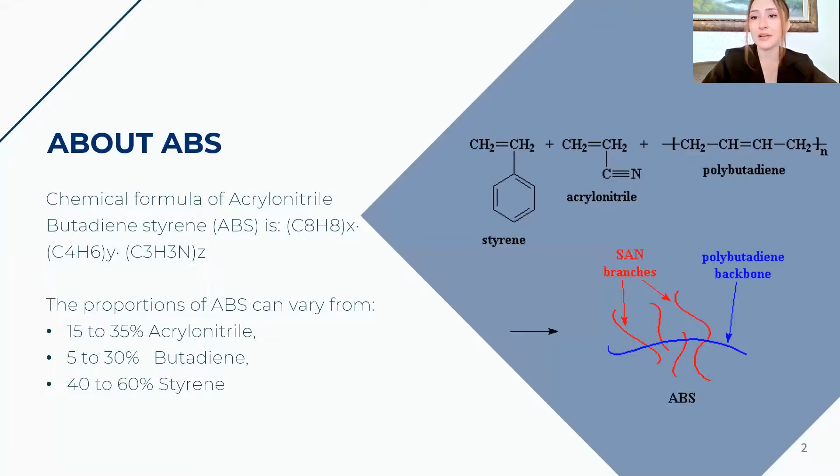Hi everyone, I'm Eda. Today we'll talk about acrylonitrile butadiene styrene production plant. ABS is a common polymer made by polymerizing styrene and acrylonitrile in the presence of polybutadiene. ABS production has been growing over the years and is projected to reach approximately 12.5 million metric tons in 2023.

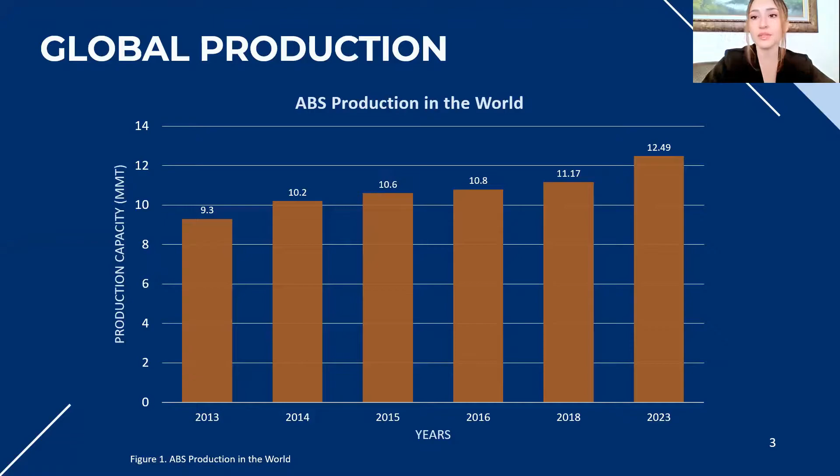The Asian market is a really important point for ABS production. The highest demand in Asian countries belongs to South Korea. Korea and Taipei are leading the import and export of ABS in 2019. Europe is not as important as Asia in ABS production. Italy, Spain, and the Netherlands are seen in ABS production in the Europe region.

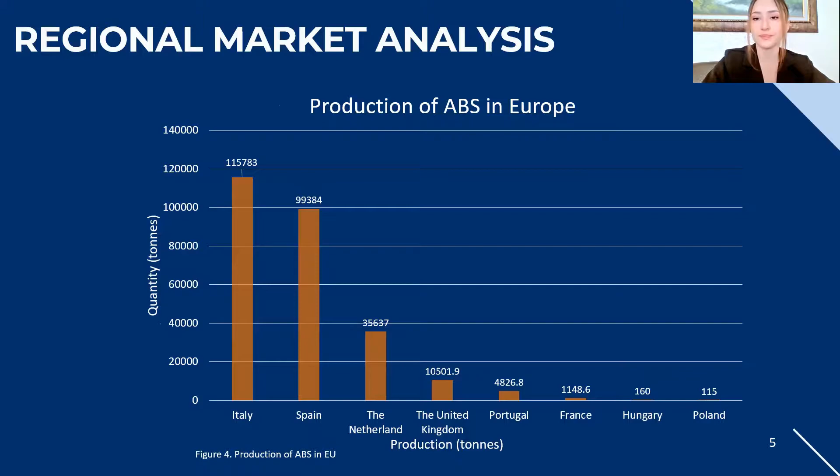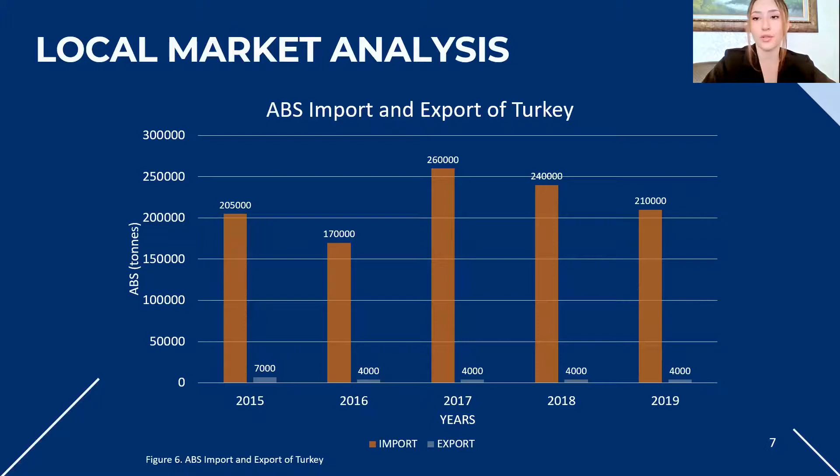China can be called the ABS importer of the world. Considering the export values, it is seen that they are quite low. It generally has more than 2.5 million tons of ABS imports. Turkey plays a role as an ABS importer. Export quantities are not as sufficient as import quantities.

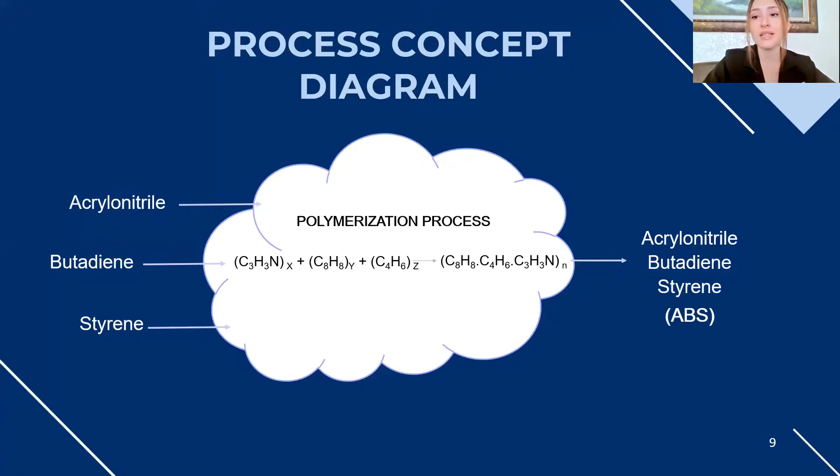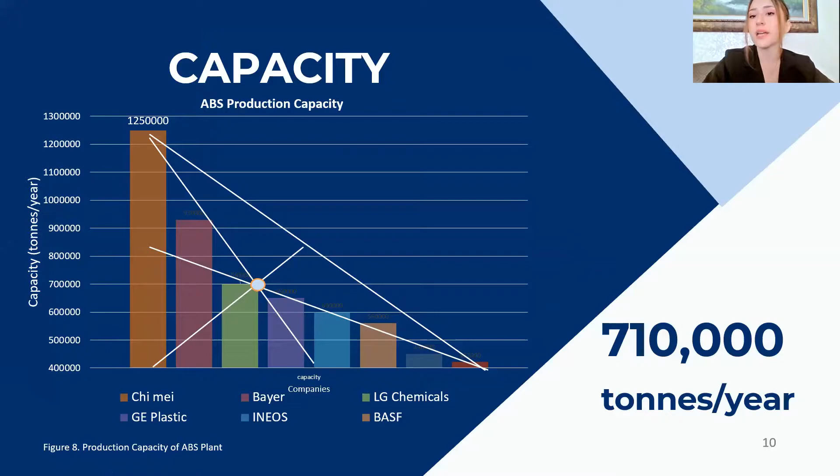In the process concept diagram, we see that we obtain ABS from acrylonitrile, styrene, and butadiene with a suitable polymerization technique. According to the annual tonnage-based capacities of these companies, we have determined the capacity of our factory as 710,000 tons per year. Calculating our raw materials and product on the basis of reaction, the profit margin we get is 1,389.

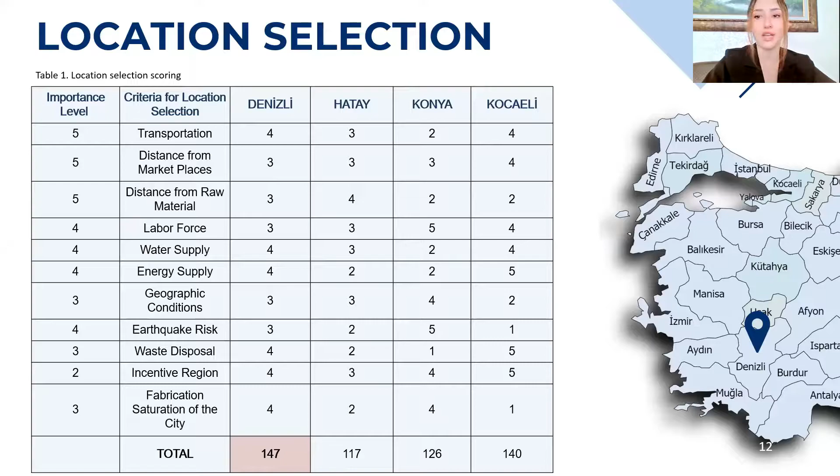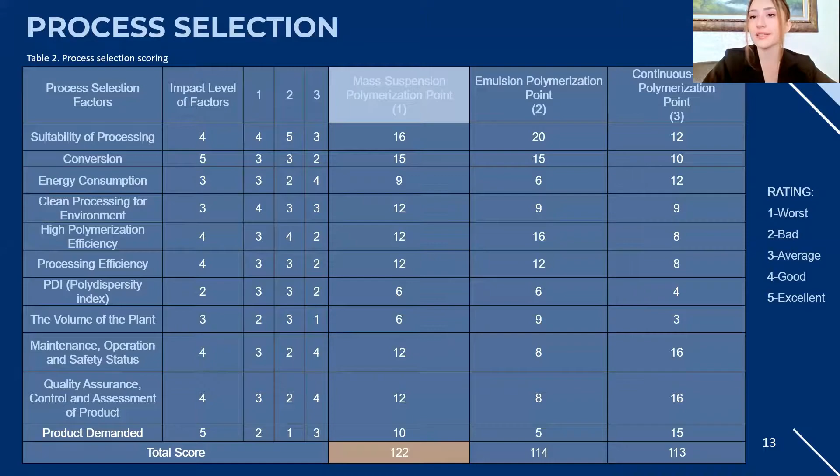While choosing the location where we will establish the factory, we considered various parameters, and then we chose Denizli, which reached the highest score, as the location of our factory. Mass suspension, emulsion, and continuous bulk polymerizations are the options we can use. By scoring, we decided that the most appropriate technique is mass suspension polymerization.

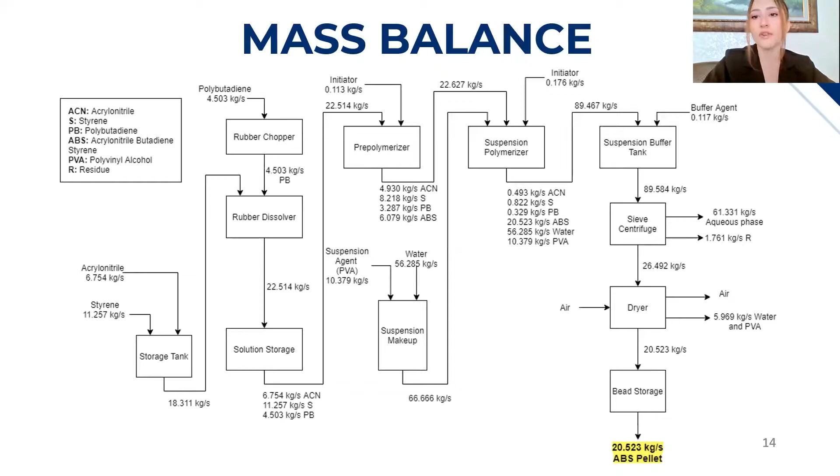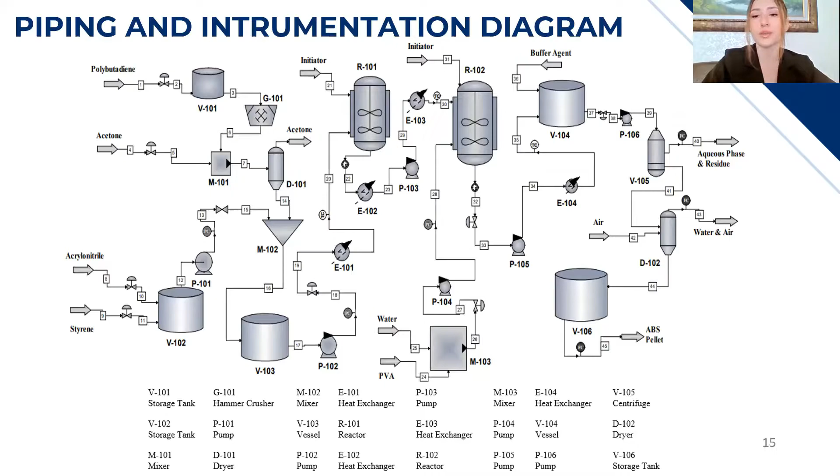By providing raw material input to the process we have chosen at the flow rates you see in the figure, we obtain 20.5 kilograms of ABS pellets per second. In the design of this process, we use ChemCAD to show the diagram, and by using the necessary process control equipment, we ensured the safe and controlled operation of the process.

Hi, I'm Burak. Suspension polymerization allows for easy removal of reaction heat and operational flexibility for polymer with controlled composition and particle morphology. Two suspension reactors are used. Each of these reactors requires a cooling jacket due to the exothermic reaction and an agitation mechanism.

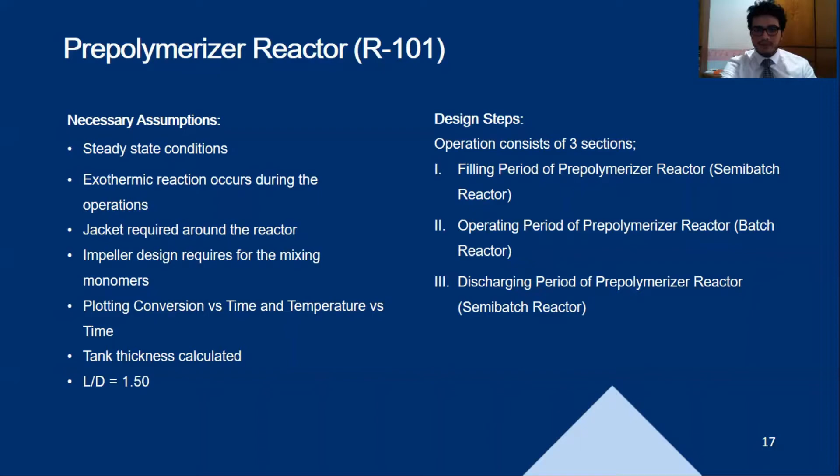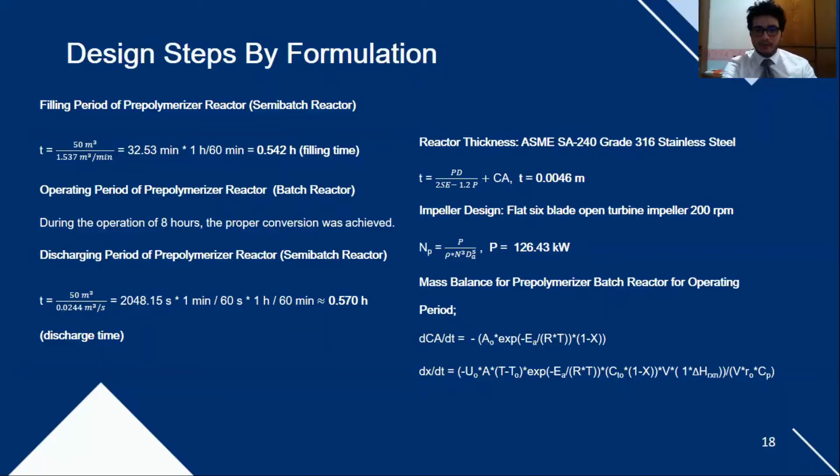These two equations should be solved simultaneously by using MATLAB to find the change of temperature and conversion with respect to time for the operation period of the reactor. After 8 hours, the conversion has reached approximately 30%. The pre-polymerizer reactor is then discharged.

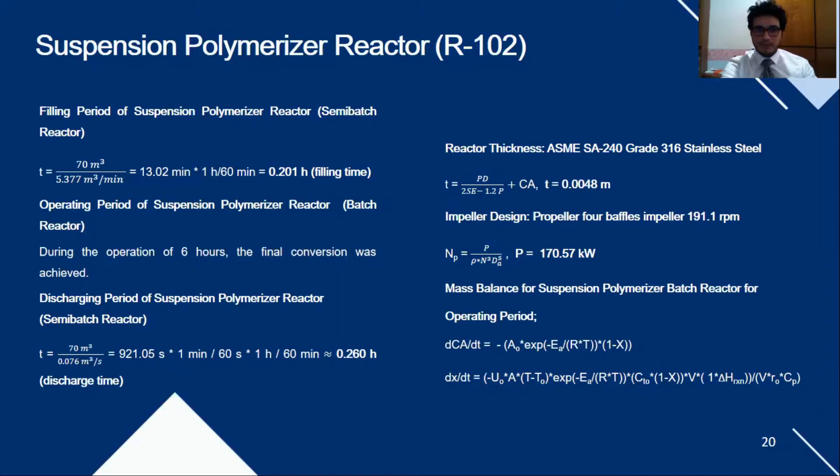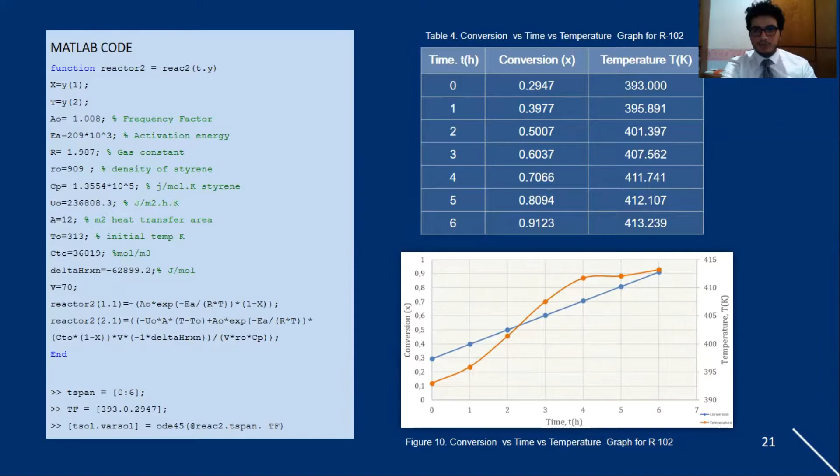The design steps and results obtained are available in this slide depending on the estimated reactor volume. The conversion at the reactor is 91% and the reaction time is 6 hours. Furthermore, there is a stirrer with jacket that supplies the suspending agent and the water to the second reactor. Its volume is determined to be 70 cubic meters.

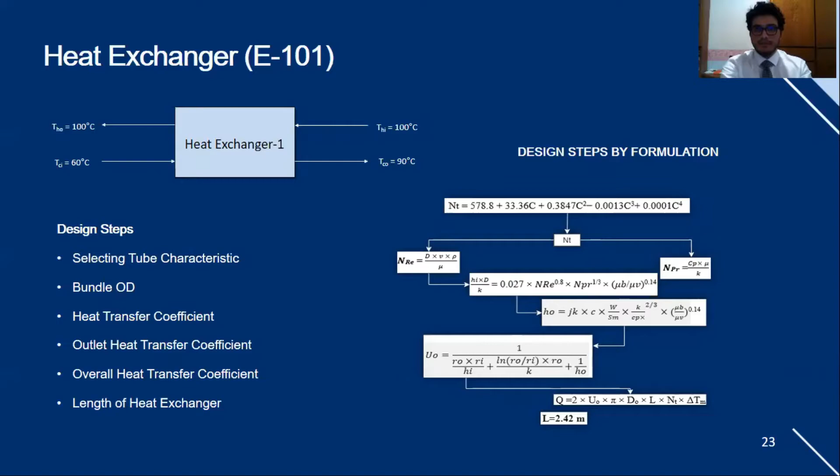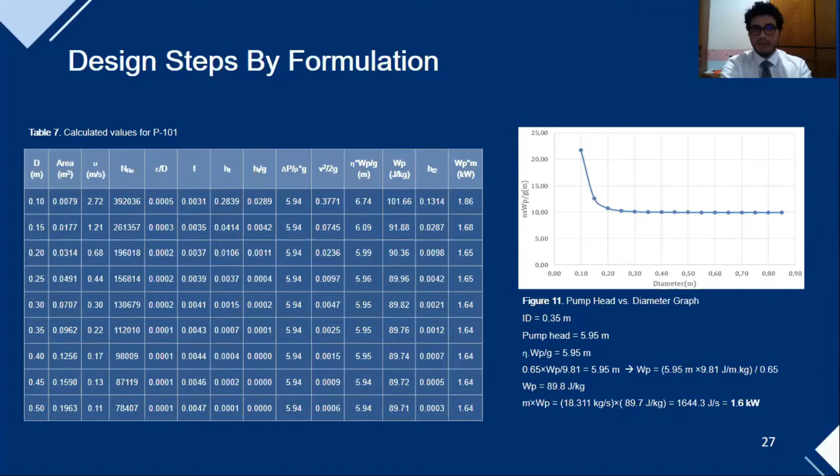The pump power will be determined using the Bernoulli equation. Expansion and contraction losses are not taken into account. The inner diameter of the pipe was chosen as 90 mm from the dimensions of standard pipe. The diameter graph was compared to the power graph. Various lengths of the outer diameter ranges were found in this summary table, and then many power values were measured.

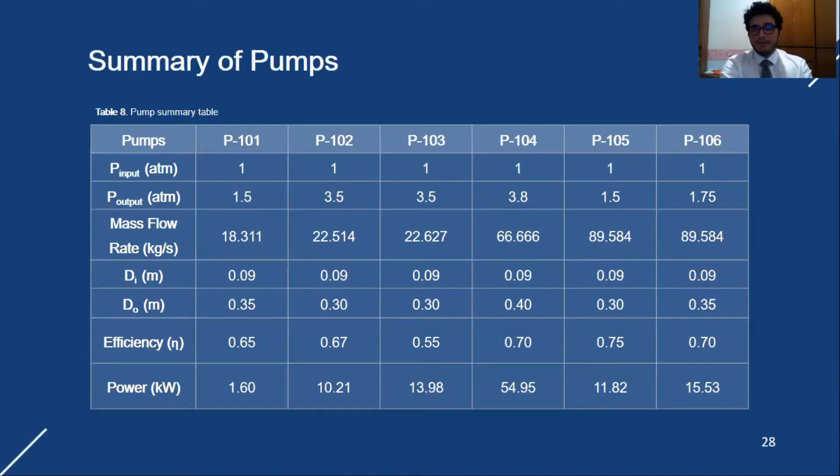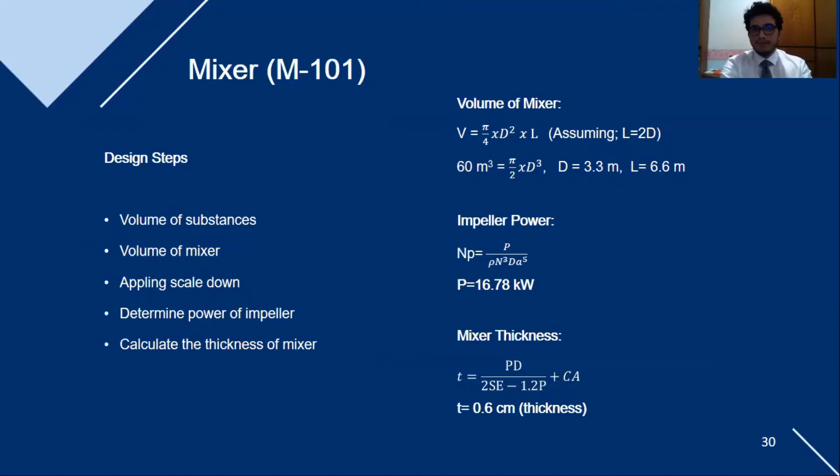Polybutadiene from the crusher is homogeneously mixed with its solvent, acetone, in the first mixer. The polybutadiene has softened sufficiently to be mixed with other raw materials.

The acetone used to soften the polybutadiene was eliminated in the first dryer. The second rotary dryer is used to remove the 10% humidity from the ABS product.

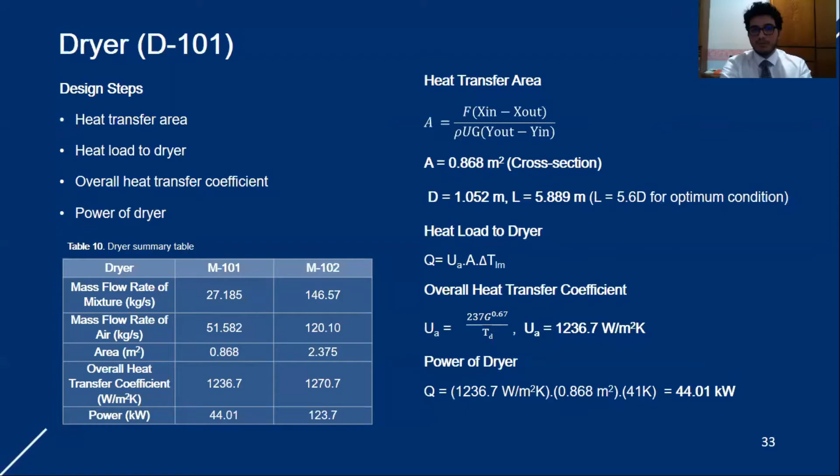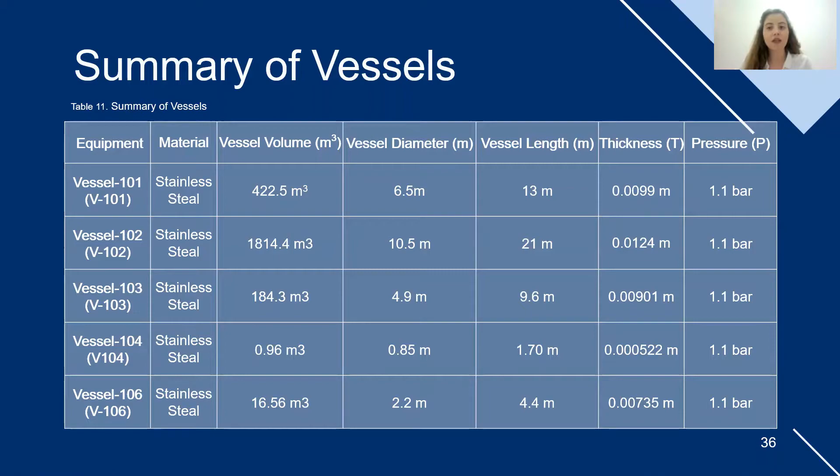I'm Miguel Almas. In our plant design, we use 6 vessels: 5 of them are storage vessels and 1 is a sieve centrifuge. As you can see in the table, stainless steel was selected for storage vessels due to our raw material storage conditions. Proper assumptions and calculations were done, and vessel volume and properties were calculated based on mass flow rate and storage times.

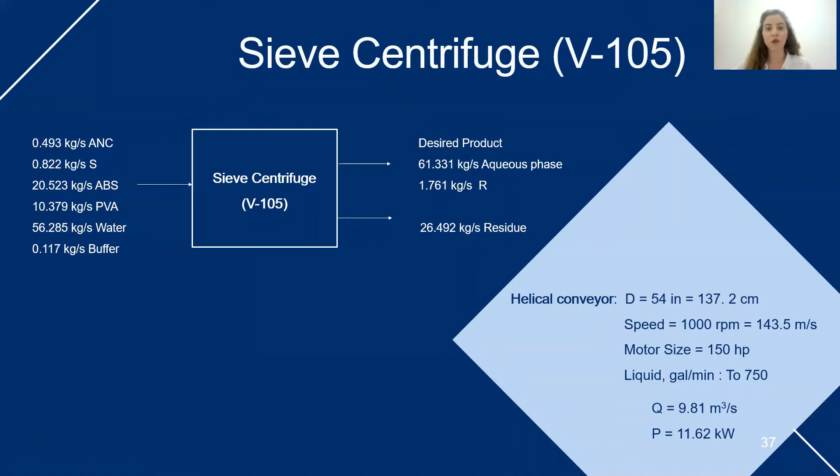In the sieve centrifuge design, after completing proper calculations, equipment with 1000 RPM was selected, and centrifuge power was calculated as about 12 kilowatts. At the end, we performed a 3D simulation to provide better understanding of our two-story facility design.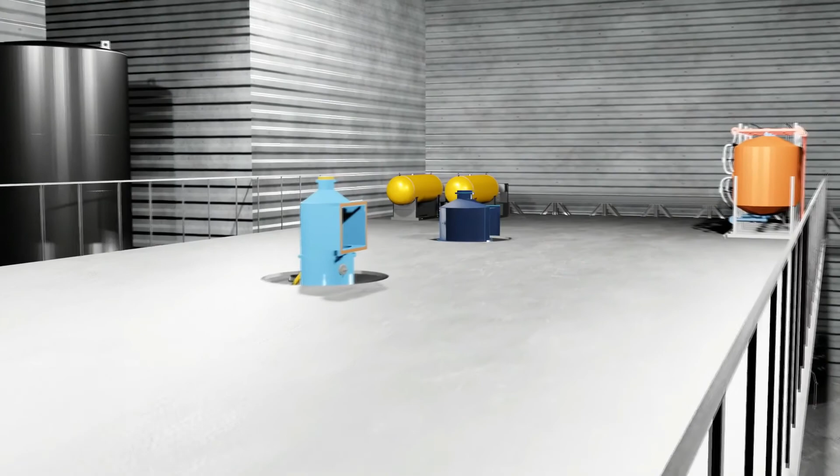In our process, we arrange 23 pieces of equipment with proper calculation and estimation. We operate 2 reactors, 4 heat exchangers, 3 mixers, 2 dryers, 6 pumps, and 6 vessels.

For cost analysis, first, the cost of all 23 equipment was calculated as about $12 million. The most expensive equipment is the reactor, as expected.

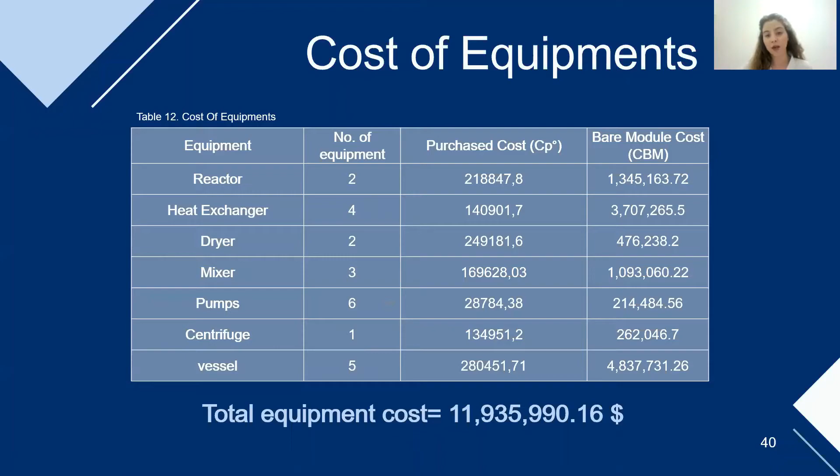Then, the cost of raw materials was calculated based on mass flow rate of raw materials, and according to prices, styrene is the most spent raw material on a yearly basis. The total cost of raw materials is about $1.5 billion per year.

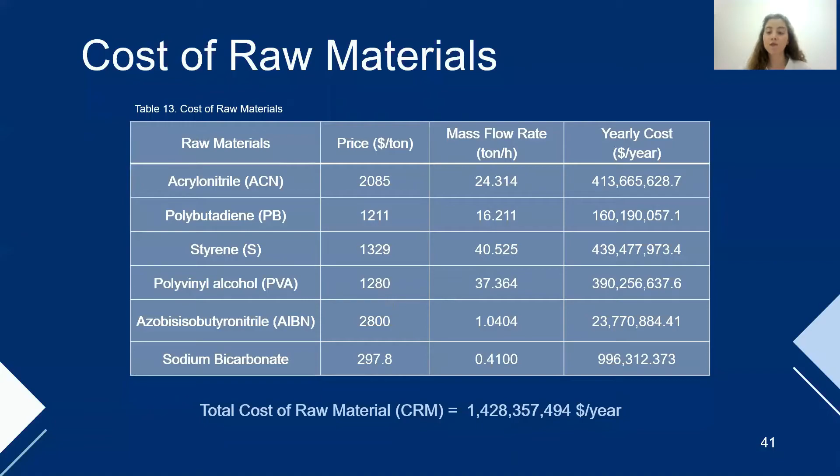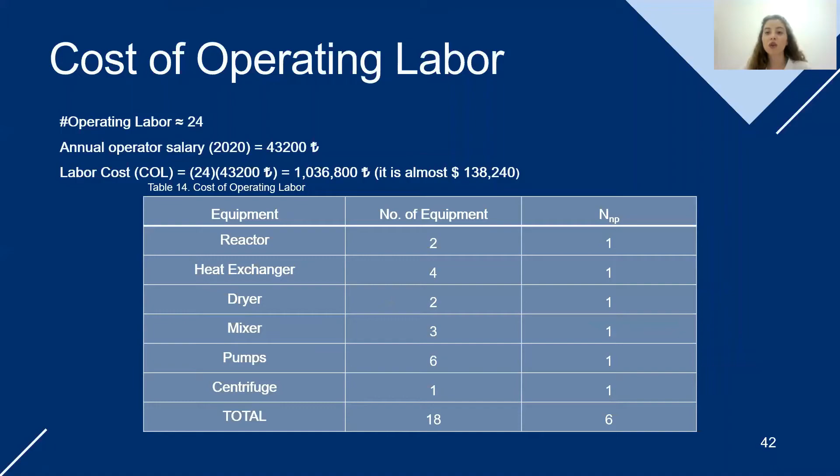We obtained the number of necessary operating labor as 24, and with the average gathered salary, labor cost was calculated as almost 1 million Turkish liras per year.

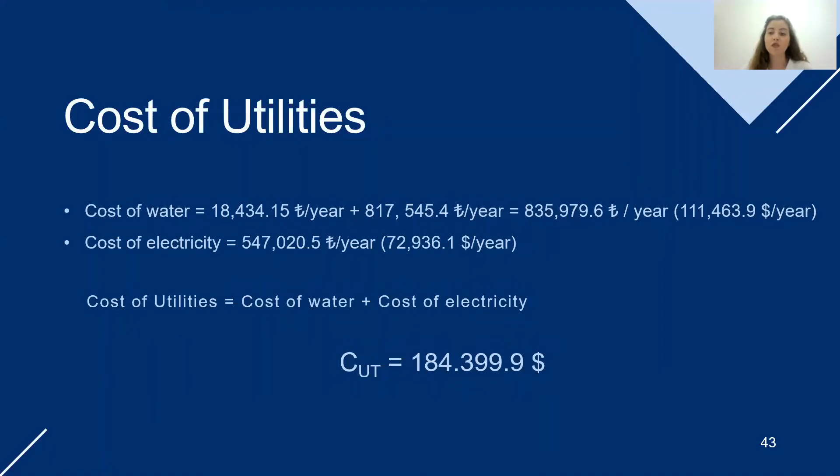Utility costs were calculated based on water and electricity consumption on a yearly basis, and total utility costs were gathered as almost 180 thousand. Of course, we need investment to bring our project to life, and we gathered the capital investment at approximately 15 million.

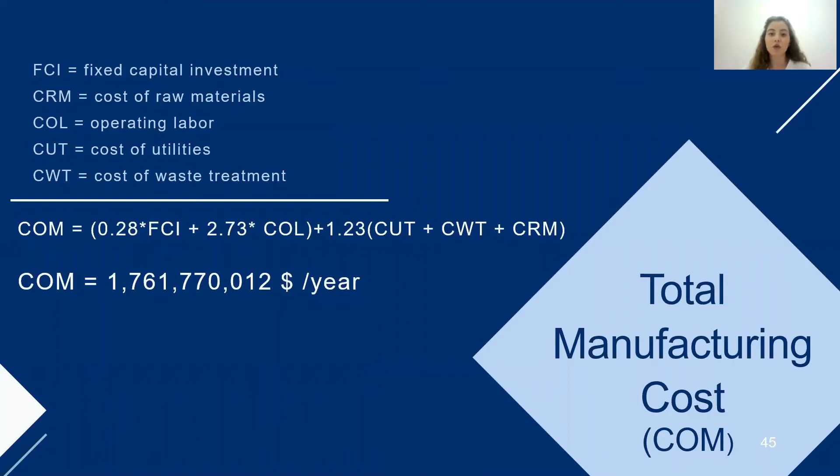Considering all these costs and gathered investment values, our total manufacturing cost was obtained as about 1.8 billion. At the end of the day, we designed a factory with a capacity of 710 tons.

We predicted that we would generate an annual income of approximately 2 billion with the anticipated ABS sales price. With this income, we calculated that our annual profit will be about 260 million.

Considering all cost and profit calculations, our facility's payback time was calculated as 6 years and 9 months.

Hello, I am Pınar. I'm going to continue with our environmental impact and safety assessment. We analyzed our ABS production system in 3 different manners.

First of all, environmental analysis was made with a checklist method. Possible risks were classified and checked in case they were provided. Electrical, equipment, general design, and maintenance risks were addressed by taking precautions into consideration.

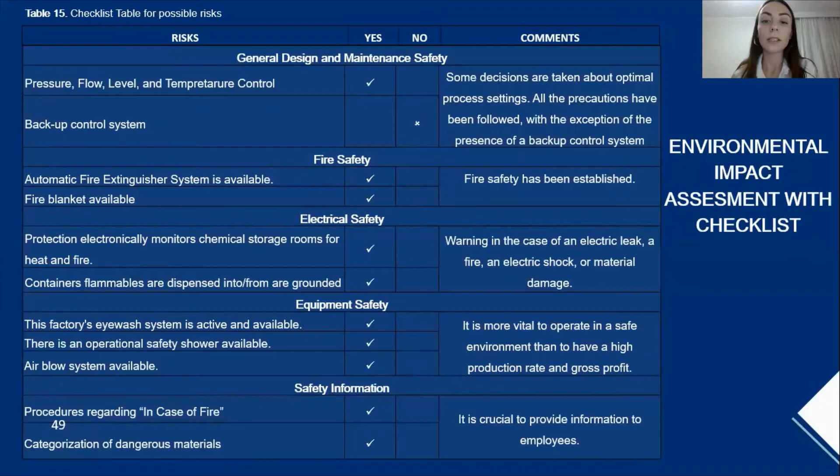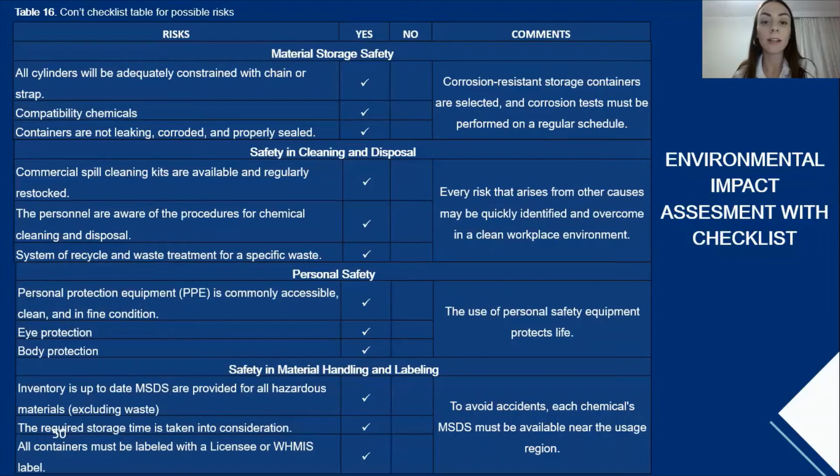However, we don't have any backup control system; a backup control system can be set up to improve our operation. On the other hand, possible risks which can be caused by storage, supplies, or disposal were analyzed, and precautions were indicated in terms of hazardous situations.

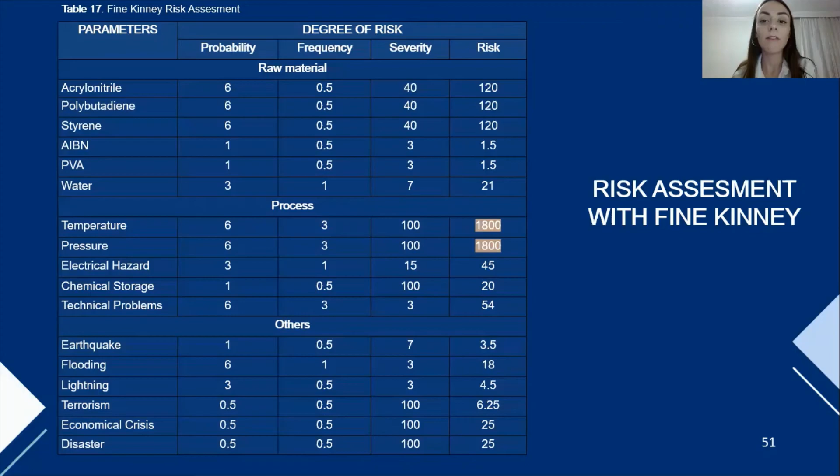Secondly, risk assessment was made with a Fine Kinney method. The risks were scored according to their possibility of happening, severity, and frequency. If the risk score is higher than 400, it shows a very high risk. Therefore, the most important parameters were determined as temperature and pressure.

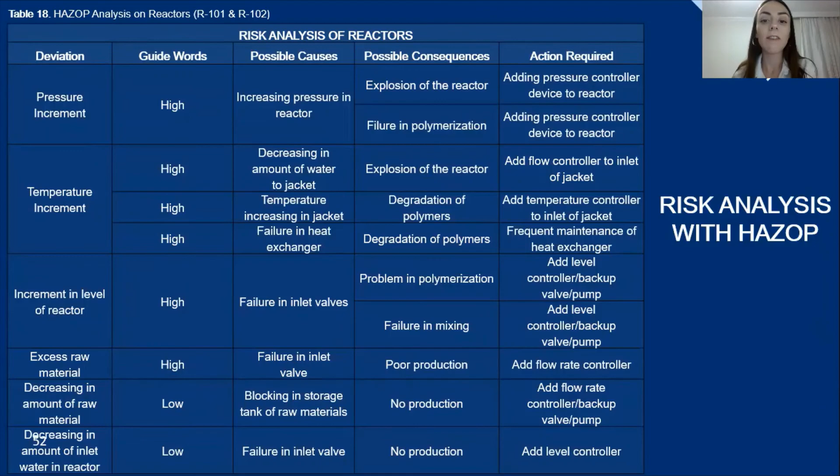Finally, HAZOP analysis was made for the first and second reactors. Possible causes and possible consequences were indicated, and precautions were suggested in our environmental report.

Our company has a 710,000 tons per year capacity with 24 employees. We aim to change the export of ABS in Turkey. We want to increase it approximately 7 years after our production begins. We want to create an eco-friendly and sustainable future, and we examine waste management and environmental analysis meticulously.